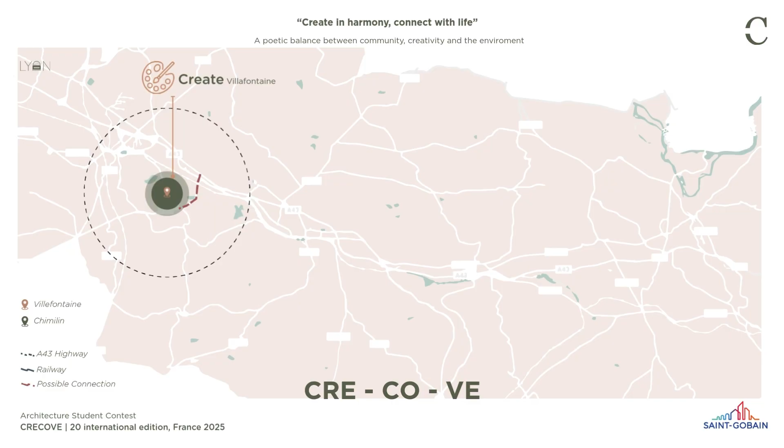With CRECOVE, we address this issue from the territorial, sustainable, and social strategies. We identify a strategic axis with a clear vocation. Villefontaine, with its urban and cultural dynamism, is the place to create. The A43 highway and the future Lyon-Turin railway are elements that connect both areas.

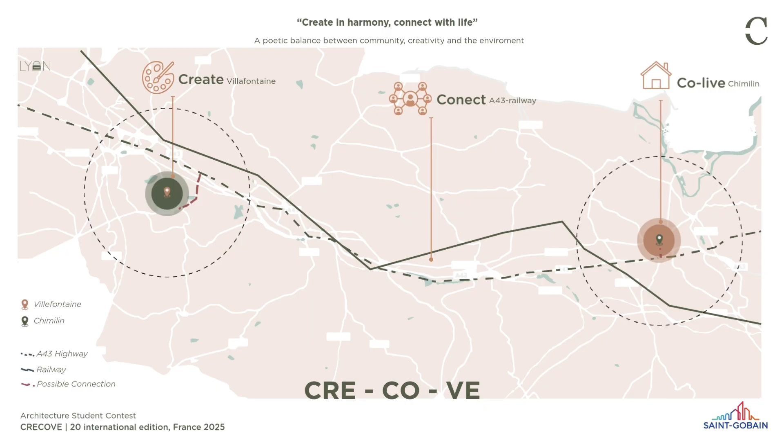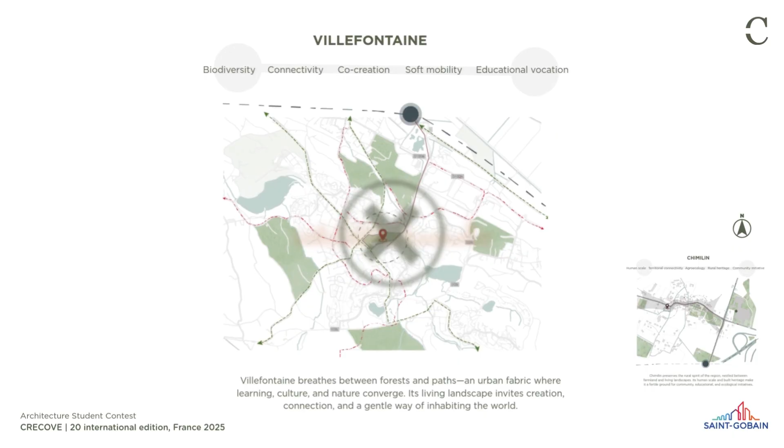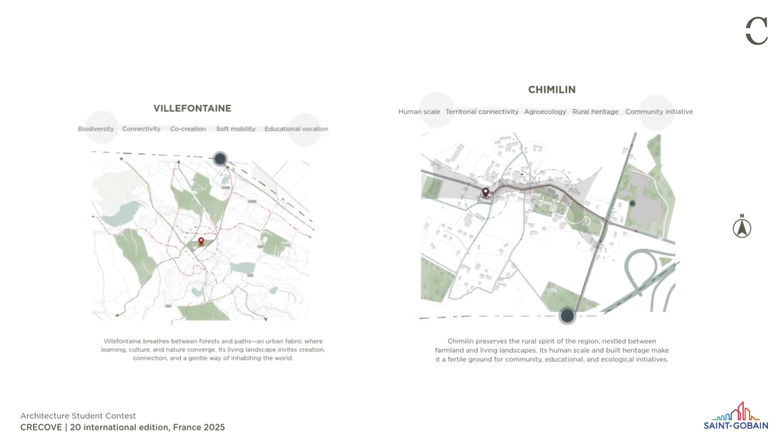Chimilin, with its rural heritage identity, is the place to coexist. On one hand, Villefontaine, defined by natural surroundings, cultural facilities, good mobility, but with functional fragmentation. On the other hand, Chimilin, defined by its rural landscape, architectural heritage, and community life, but marked by abandonment and lack of renewal. Both places share a common need to reveal the human fabric to architecture, integrating the existing and projecting new ways of inhabiting.

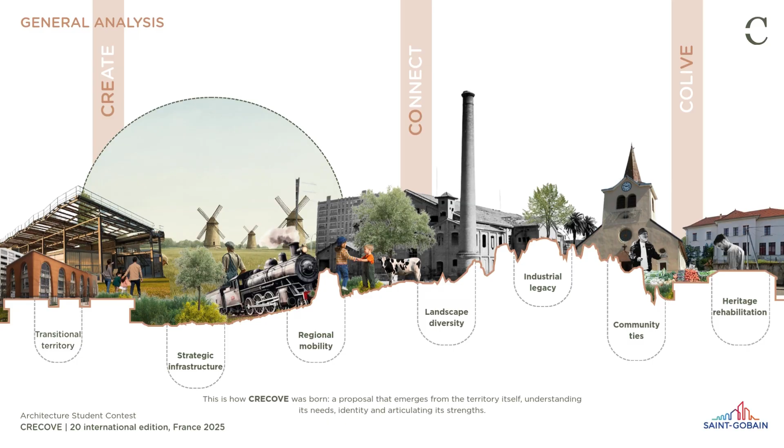Although both sectors have physical potential and connectivity, they still lack real social bonds. That's how CRECOVE is born, grounded in the territory, it articulates local strengths and proposes new forms of encounter and coexistence.

What if an old rural school became the living heart of a community? That's what CRECOVE does, restoring its rammed earth walls, renewing its roof, and ensuring universal accessibility. The exterior is activated with spaces that strengthen the sense of community. Here, create, connect, and co-live become everyday actions.

This center is linked to an intergenerational program of learning, recreation, and exchange. We create a community hub that creates, connects, and enables coexistence.

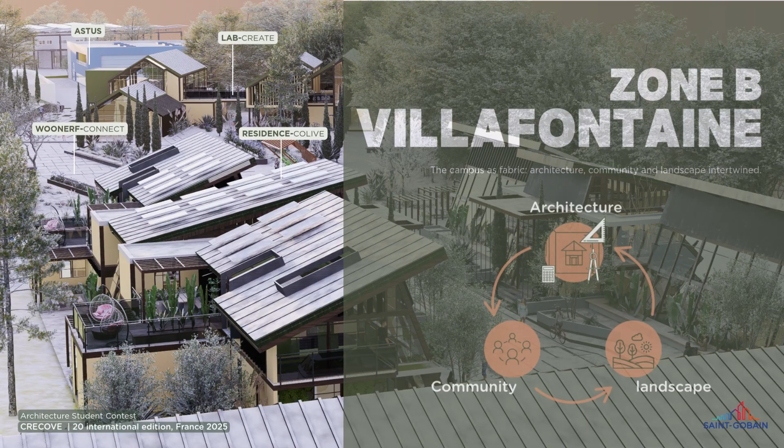The campus as a fabric, architecture, community, and landscape intertwined. A horizontal and adaptable master plan designed to grow progressively until becoming a complete campus. The design integrates the co-creation lab as a space for cultural and pedagogical projection. The Woonerf, a road that connects and articulates the project.

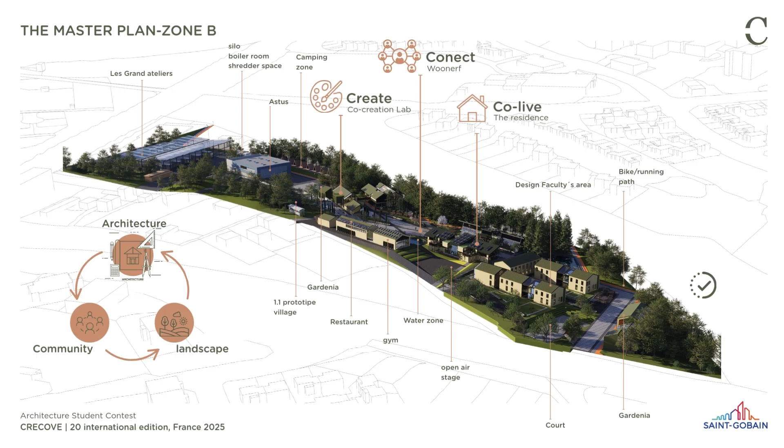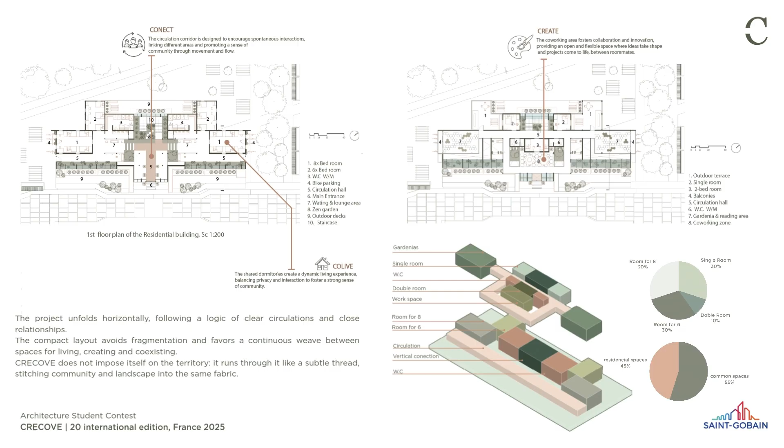The residence, where living also means sharing and learning. The residence is not just a place to live, it is a space designed for experimenting, learning, and coexisting. Floor plans are organized with clear circulation paths that connect defined yet flexible facilities. The design flexibility is expressed in a variety of room types for students and researchers, tailored to their needs and comfort, using sustainable strategies and materials.

The Co-Creation Lab is envisioned as a living hub for collective creativity. Its program silently supports Astus and Les Grands Ateliers. The Co-Creation Lab is the creative core of the campus. Here, to create is also to connect.

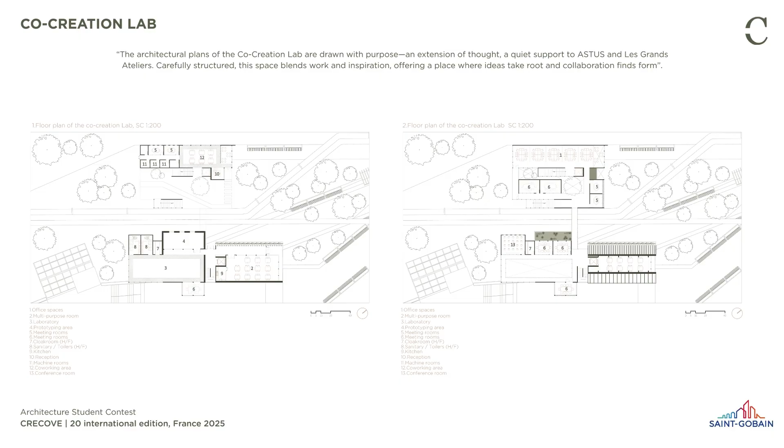Passive strategies like solar orientation, cross-ventilation, and chimney effect, along with solar panels and efficient materials, optimize thermal comfort and reduce energy consumption and environmental impact. Also, geothermal energy reduces heating needs by up to 70%, cooling by 50%, and carbon dioxide emissions by 60%. Rainwater harvesting decreases potable water demand by 30% and allows recycling over 260,000 liters per year.

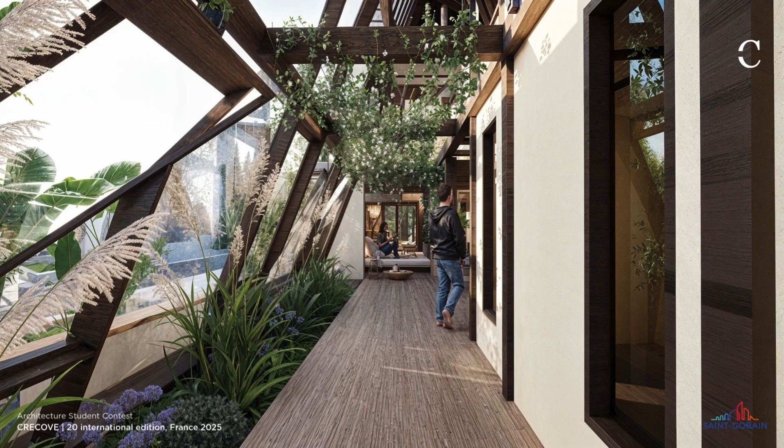The entire project is supported by a modular, detachable, and adaptive structure. In addition, materials like glulam, Saint-Gobain insulation, and acoustic floors complete this strategy. That's why here, sustainability isn't disguised, it is built from the ground. The results of environmental and life cycle analysis show that CRECOVE achieved year-round thermal comfort, significant energy savings, low ecological footprint, and high durability and material efficiency. That's why we can say CRECOVE is more than a viable project, it's a replicable model of sustainable coexistence.

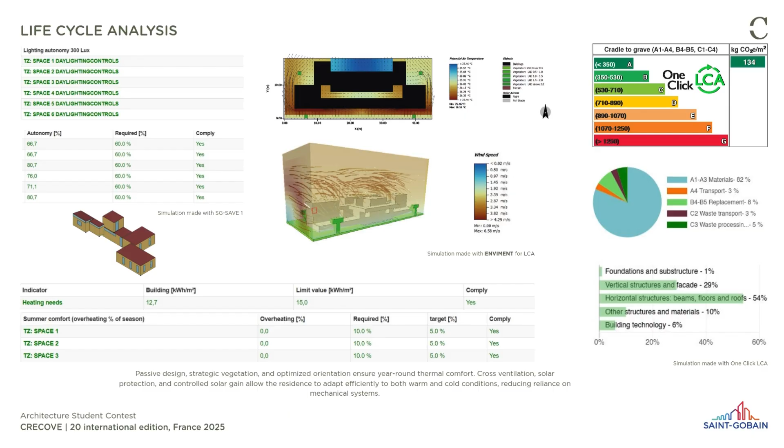CRECOVE proposes a transformative connection. It doesn't occupy the territory, it interprets, complements, and activates it. Thus, create, connect, and co-live becomes the model and living structure of our project, summarizing a proposal that respects the past, responds to the present, and projects a sustainable future. That is CRECOVE.